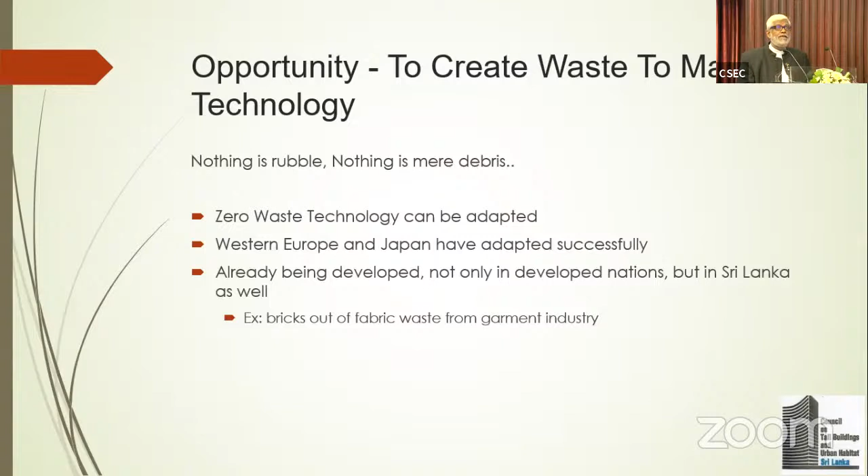Then, the opportunity to use alternate local material for construction. I know there was a time, I think during Dr. Kulasinghe's time, when we were developing certain types of laterite block, using clay with a percentage of cement, which gave fairly high strength. I don't know whether that laterite block is still functioning. These are things we developed but forgot to continue, for easiness, and that's another area we should look at and go back to.

I know of a project done many years ago by one of the leading architects at that time, Mr. Valentine Gunasekara. He built a hotel down south, and some of the slabs, not high long-span slabs, were reinforced with bamboo. I don't know if that technology was developed further; it was just dead. If it had been developed today, we would be scoring very high given the steel prices. Bamboo is a material you grow, cut, and grow again, a sustainable material. We have to look at that type of thing.

Then, the opportunity to create a sustainable construction industry. That is where we are looking, as there is so much high-technology development happening in the world on how the industry can be more sustainable in the coming years.

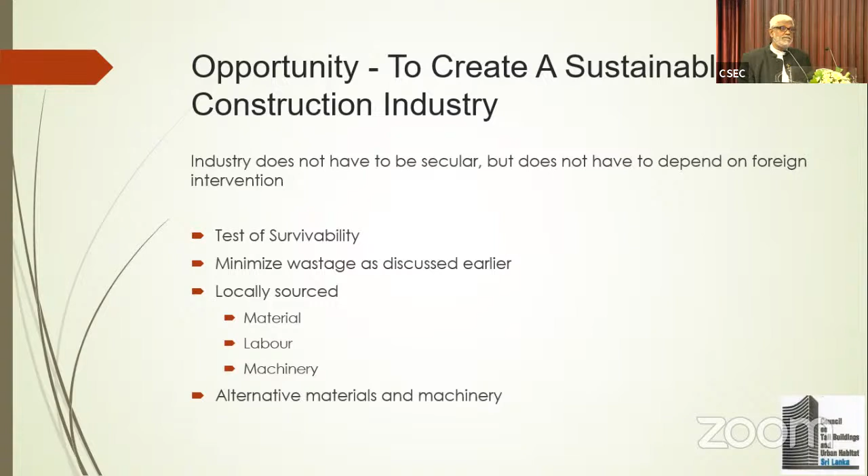Opportunities for young professionals. Yes, young professionals must take this as an opportunity to grasp new technology and work in the global market. When I was president of the SLIA, one of my missions was a statement: we should not be training local architects, we should be training global architects. Unfortunately, that was not carried forward sufficiently. If we had those global architects today, none of these architects would have had problems here, because they would have been global and could travel and work anywhere.

There are certain ingredients, five ingredients I mentioned, for how we make global architects. These are opportunities that we should take forward and navigate this crisis to the best of our ability, because all of us are experienced professionals in the industry and know how to handle things, how to get out of a crisis. So let's all work together on this.

And now, further to the above, recently, CCI made a presentation to the government by submitting a detailed report of the status of the construction industry in Sri Lanka.

I'm glad to announce that after continuous lobbying by the CCI, this week we received a letter addressed by the Department of Fiscal Policy of the Ministry of Finance to the following: Secretary, Ministry of Urban Development Housing, Secretary, Ministry of Industries, Director General Department of National Budget, Director General Department of Public Enterprise, and Director General Department of Public Finance, asking them

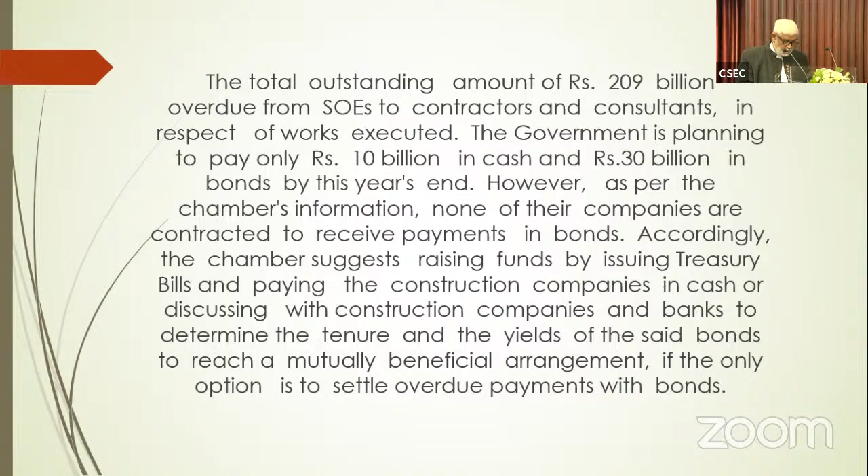So at least we are told to pay one-third of the total overdue amount by end of the year, another one-third by March 2023, and the balance before end of 2023, which is not going to come. So the settlement of construction companies should include interest on delayed payments calculated at the prevailing bank overdraft rate and things like that.

So these are some issues that we have now addressed, and the Ministry of Finance have now put all the ministries that I told you to give their observations and what they think they can do. So at least we have got one step forward. To get this letter out from the ministry took us more than 3 months. So anyway, those are the issues.

Because of the crisis, I was supposed to talk about the crisis, so I'm talking about don't get depressed, we need to come out of this. So ladies and gentlemen, we sincerely hope that there will be a positive response from the said ministries so that we as the construction industry can formulate a long-term policy for the sustenance of our industry. Thank you very much.

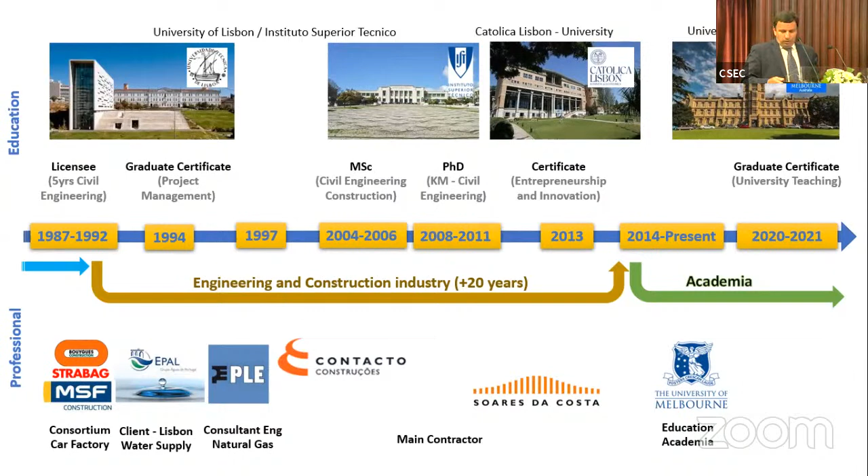Relative to the Council of Tall Buildings, just two publications after I moved to academia. We're trying to share knowledge on how construction management practice can help companies be more profitable, help sustainability, and help reduce net carbon emissions.

Those two cases: one clearly shows our construction management sequence can really improve productivity in tall buildings, that was a case in Melbourne. The other is how plumbing services can really make a contribution to reducing waste.

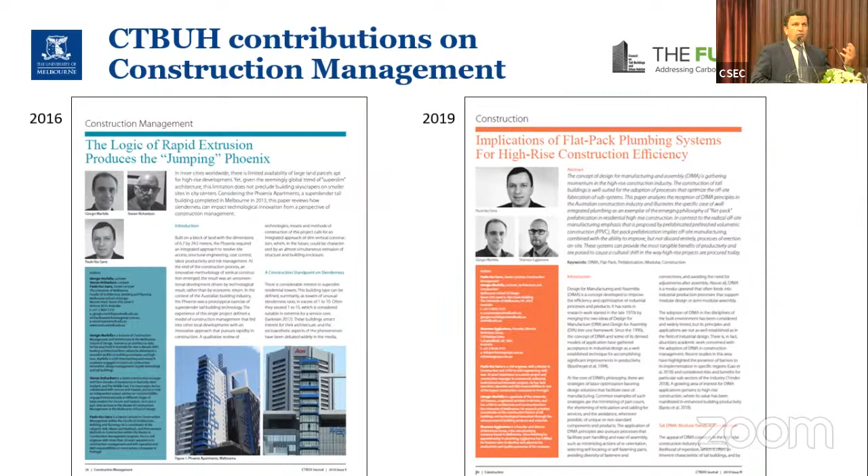On the topic of today, I just read the book we recently published on managing project risks. I think the idea of publishing this book was mainly to give a good tool for everyone, mainly professionals in the construction industry, but projects in general and students, to give them the best approach if they want to develop a risk management system.

It's our passion, it's what we really want. We focus on construction risks, on managing risks mainly. If you address that problem properly, you really feel more prepared and can help your clients, your stakeholders, and be more effective.

I ask you, if you want to have a look at the book, start on chapter 18, which is strategic risk management. That chapter will help you understand what is the best system for you. The dimension of the company is essential—if you are a small company, don't try to invest in a big system that is too expensive, too complicated. If you are a small company, you need a system that is suited for you.

Sometimes Excel is enough. Obviously, if you have a $2, $3, $4 billion dollar project, you need something more sophisticated, but also you have more resources to apply.

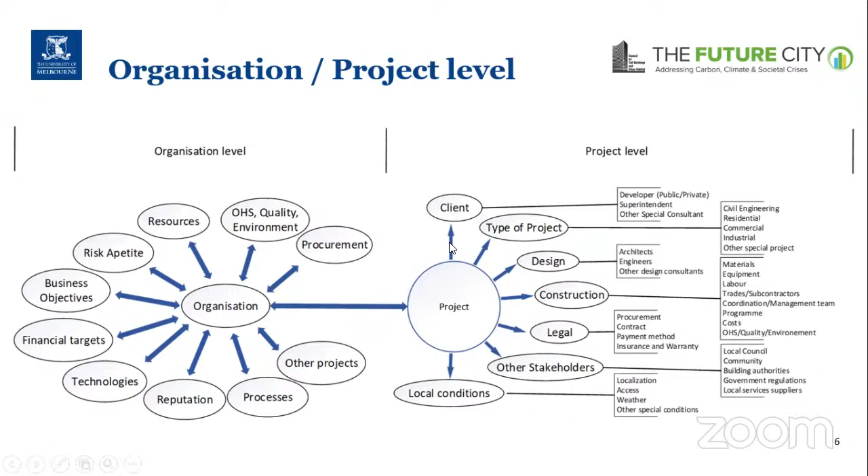Try to see—usually things don't happen immediately in the way you expect. Some have more consequences than you think, but having this is one of the best ways. All directors of companies need that as a base for their knowledge—having someone collect all the information related to the business and put it in front of the table, helping their coordination.

We don't know exactly how politics can react, and some reactions really confuse everyone—we don't know what the reasons are behind some decisions. We believe they want to do the best. Unfortunately, we live with the consequences of good decisions and bad decisions, but we can always try to manage that.

Anyway, we can't talk without the slides.

You can have the most sophisticated system, but if you put rubbish in, you receive rubbish out. Having an understanding of exactly what the context is of your company, of the project you're involved in, is essential for starting to understand the problem.

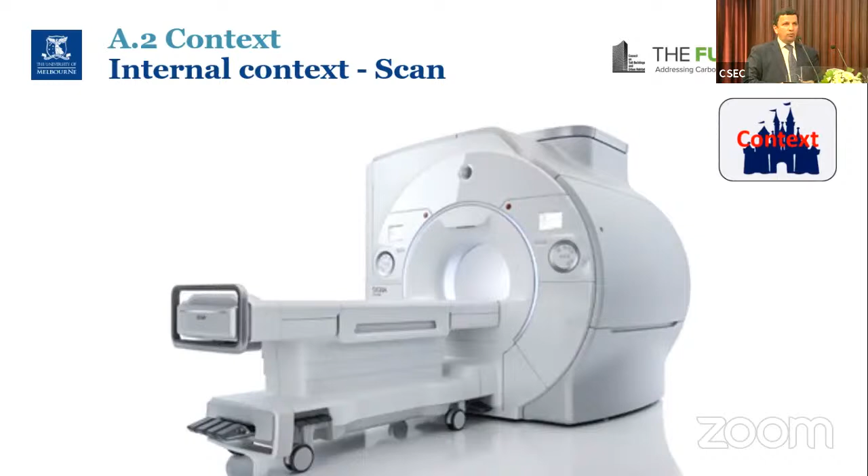Objectives - is labor the problem? Do we need to make profit? Is it time, quality, relations with your clients, health and safety? We need to be the winners, the best. We need to innovate. We need to be environment friendly. We need to be international. Some of those things that we are discussing today cover those perspectives.

Internationally can be an option now in crisis. Diversify - it's another option. Remember, each stakeholder has their own risk profile. If we meet three or four of us, each of us has a different risk profile. When we are thinking on risks, you need to look at your own risks, but each of the stakeholders involved in the project has their own risks. Sometimes they are conflicting - the risk of making money for the contractor can be probably something negative for the client because he wants to keep the money.

Causes, events that have an impact on your risk. You have different tools, I made that available for you. Think about different tools and techniques to identify risks. We just put that together, have a look at the book in that chapter for you to know there are lots of different techniques to identify risks.

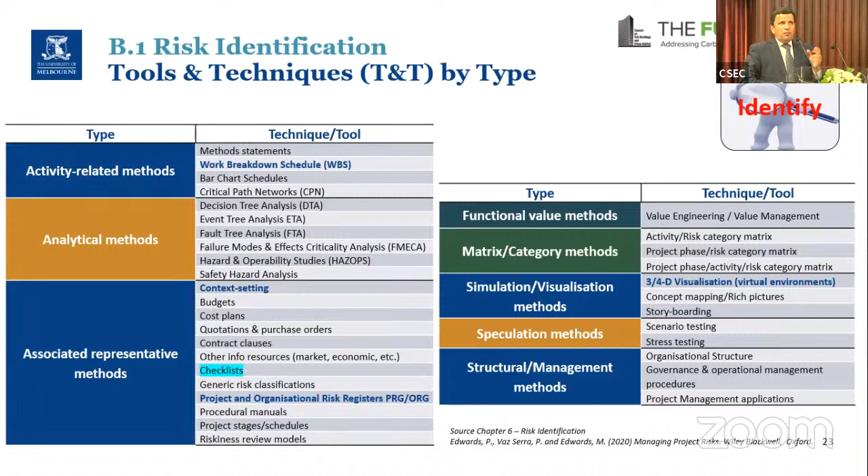You can use some that are specific for safety, others for chemical areas, just for you to have an understanding of what can be available. But the main thing is all of them have brainstorming workshops. It's the best way to identify risks - put people together and try to understand, for each of those involved in each part, what are really the risks.

In big projects you can have hundreds of hours of these workshops, but it's essential that you sit with the team. Sometimes you go to the quality team, or the procurement or commercial team, or finance team, and bring as many people as you want to try to clearly identify the risk. This is essential for the success of your project. Remember, each team has different risks, even for similar projects.

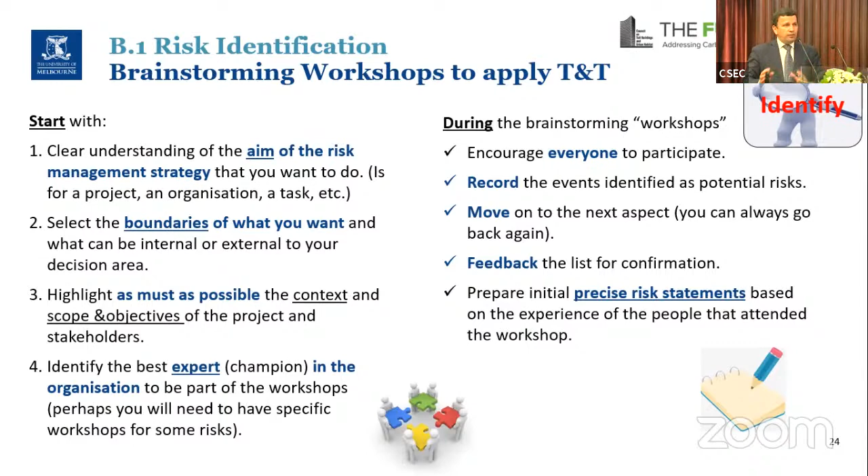As soon as you have that identified, first identify the risk, then you rank it and make an evaluation.

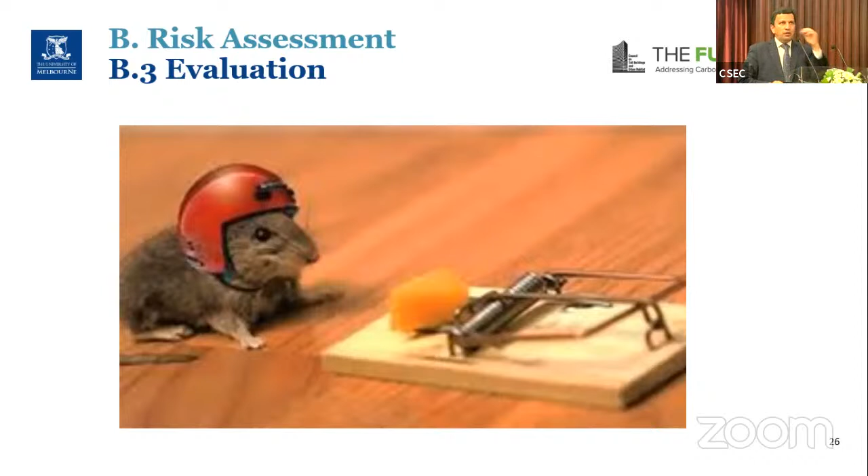Then how that works in the evaluation phase is essential. Insolvency, an unfinished project, we have now covered this. Was the procurement process correct? Did I take too many risks in the procurement phase? I thought at the beginning I was enthusiastic with my client and could include everything. Do I have to make an assessment properly?

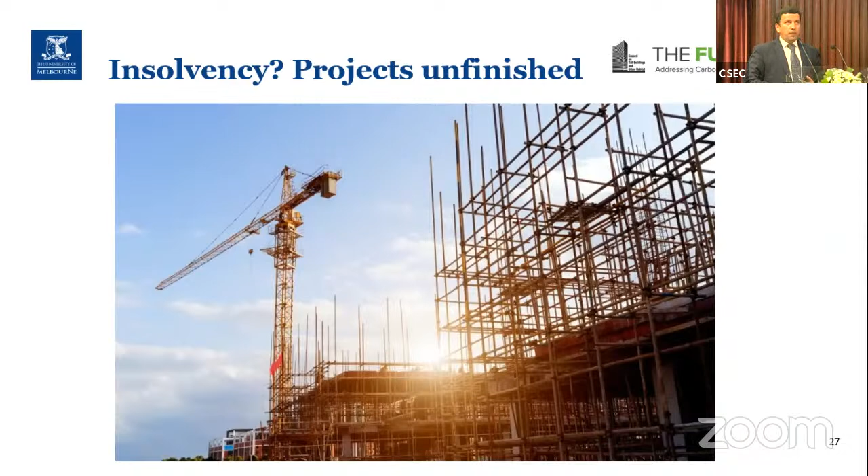It's quite an interesting conversation that happens. What's happening is the client is happy at the beginning, he opens a bottle of champagne, he transfers all the risks to the contractor, and at the end he has an unfinished project. I don't know if you did well opening that bottle of champagne at the beginning, because this model probably costs us later.

Cash flow, how is your cash flow management? I'll just take two minutes, sorry, it's already timing and I want to keep time as promised.

But cash flow, do I have enough contingency? I don't know if you're clear about contingency - it's the amount of money that I need to have in reserve if something goes wrong.

I have a commitment with my client since the beginning about the payment date, this is essential. How is the payment going to be? How am I going to commit with my subcontractor on the payment date? Do I have these dates clearly set? Do I have money in the bank to pay? It's not like before, we don't have that anymore.

When I started, my company had a 20% profit margin. It was fantastic. Now, after we had just 4 or 5 percent, this suddenly became a big problem. We don't have any more cash. So how we manage cash flow is essential - we can have profitable projects.

ProBuild is a big company in Australia that just went bankrupt. They had profitable projects, but because they hadn't managed cash flow properly, on top of COVID and increased times, they went bankrupt. So having a contingency plan is essential.

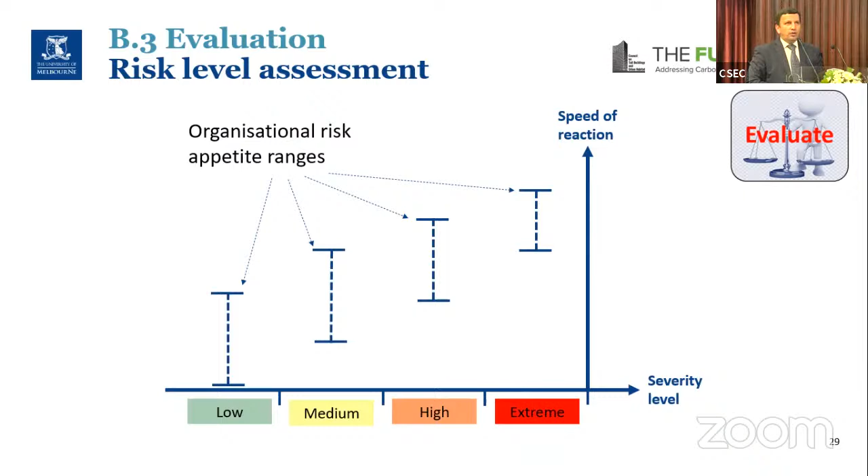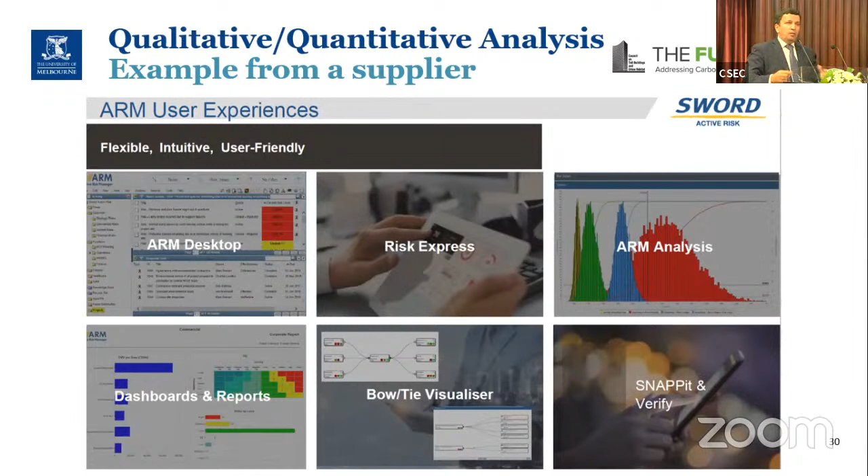How is your strategy on speed of reaction? You put your risks there to visualize. This is a commercial tool with lots of different options to support you. It's expensive, so it's only for big projects, but you now have available the tools to help you manage risks properly. But before using this, use the system properly first.

Then you go to the treatment: what you are going to do. You're going to avoid, share, or reduce. When you link those with your risks, you have your actions. Everyone knows if a risk is to avoid, you need to take immediate action when it happens. If the risk is to reduce, you have other activities to do. Having these visuals and dashboards helps the management take decisions.

This took a little more than 2 minutes, but this is a real example, and managing a risk register like this one can be very simple. If your organization is small, don't make that a problem for doing risk management properly. You can do it in a simple way.

And probably it's a new business for some of the companies here, helping the client de-risk. This is with the client—you really help the client to understand the risks, the main parts of risk of their project, and how you can really de-risk those projects and make something really beneficial for all.

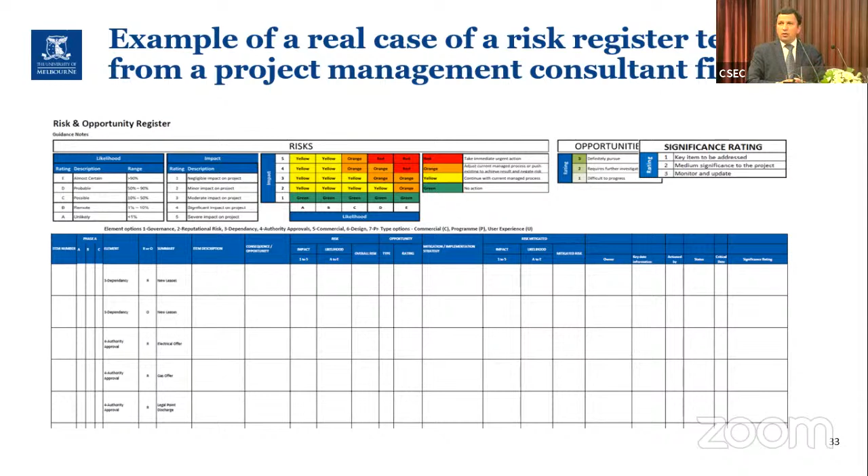I just give you some more data for you to see. Thank you very much. I think we keep more or less on time.

Sorry for some issues at the beginning and during the IT, but my message, I think, was this: trying to understand that risk management exists. Risk management is essential for you to understand that. If you have a strong risk management system, new waves can come—don't be afraid, you already have preparation, and take this big crisis as an opportunity. Always transform difficulties in your life, in your company, in your country as an opportunity. What can we learn from what happened to make us stronger for the future?

Thank you very much. If you have some questions, thank you.

Have some questions? After? Okay, then we have the Q&A after. Okay, thank you.

Thank you, Dr. Paulo, for that timely discussion on managing projects during economical crisis and for carrying on despite the technical errors. The second session on the agenda is the Global Trends Towards Net Zero Tall Buildings, conducted by Professor Priyan Mendis. Priyan Mendis is a professor of civil engineering at the University of Melbourne and a structural engineering consultant. He worked as a structural engineer at Connell Wagner in Melbourne before joining the University of Melbourne in the 1990s. He has been an expert consultant for the design of tall buildings in Australia and overseas, including some of the tallest buildings in the world, and an active participant in CTBUH since the early 1990s. He is also an expert on fire design and protection and a key member of the CTBUH Fire and Facade Committee, presently leading many projects in that area. Professor Mendis has written more than 400 papers with close to 12,500 citations. In 2020 and 2021, he was included in the database of the top 2% of researchers worldwide, prepared by authors from Stanford University. I now invite Professor Priyan to conduct the session.

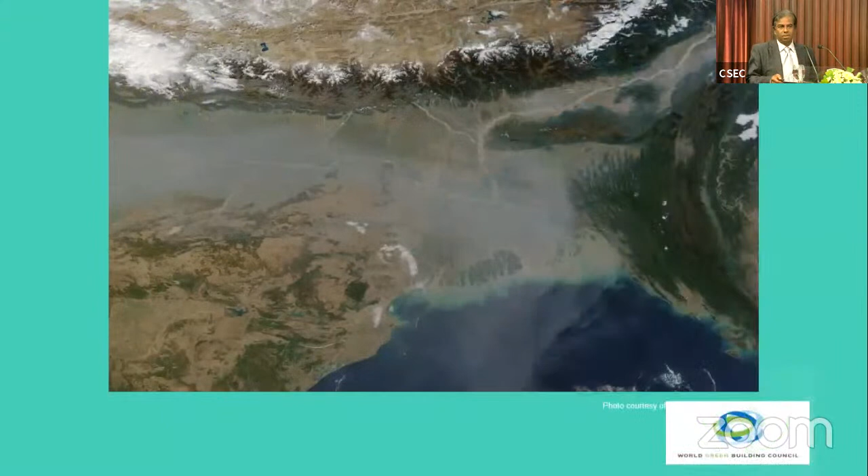So these photos we have seen, I like the same photos I used right now 15-20 years back. I can still say the climate change is real, and the ice is melting. You can go and visit Europe now. These are all happening, we don't need to go and show.

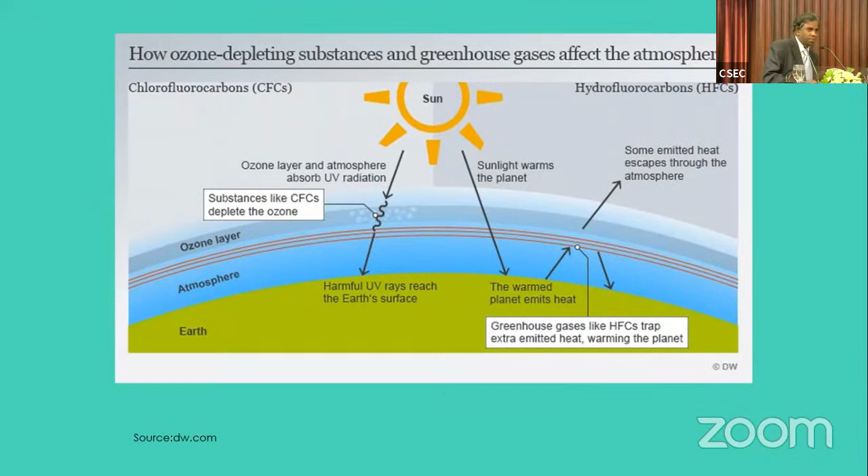Those days when we talked about green buildings and climate change, 50% didn't accept it. US itself 50%, other places as well. But now everyone believes, close to 100% believes. It's unusual to have someone say there's no climate change. And it is happening, this is totally happening now.

Carbon dioxide levels have been measured. It's been proven scientifically, it's not really assumed values. When you measure, you can see the temperature rise.

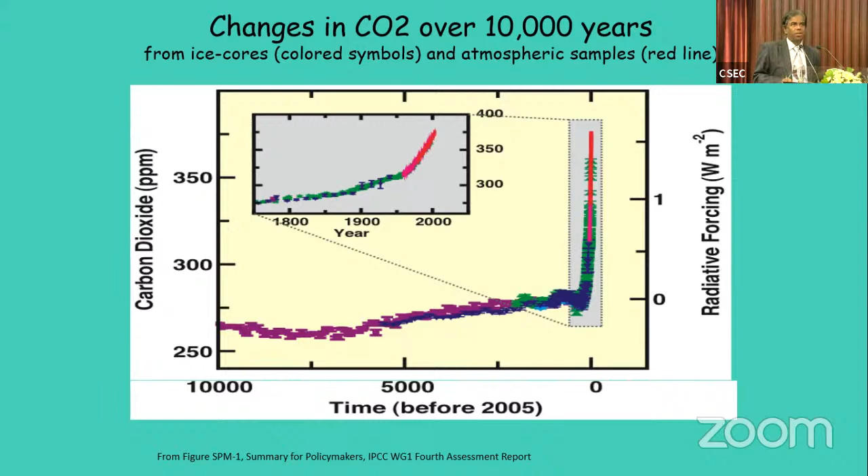When this book was written by Mark Lynas, saying 6 degrees, everyone was saying something's wrong with this guy, how come 6 degrees? He was saying 6 degrees means humans won't exist. Now we are saying, finally by 2050, we are trying to restrict the temperature rise to 1.5 degrees. So 6 degrees would have happened if we didn't do anything, if we didn't get to net zero carbon to really restrict to 1.5 degrees. So now Mark Lynas was very happy about what he said so many years back.

It's happening in Sri Lanka - droughts, climate change, and extreme events. We can see that just because of climate change, it's happening - the droughts and the floods in some parts of the world, landslips, very common now even in Sri Lanka.

This map, which I again showed in another CTBUH forum last year online, in one of the forums - but the carbon, even when I showed this again probably 1.5 years back, it's even hotter now. Carbon is becoming really a business now - carbon accounting, carbon management - people have started businesses just on carbon.

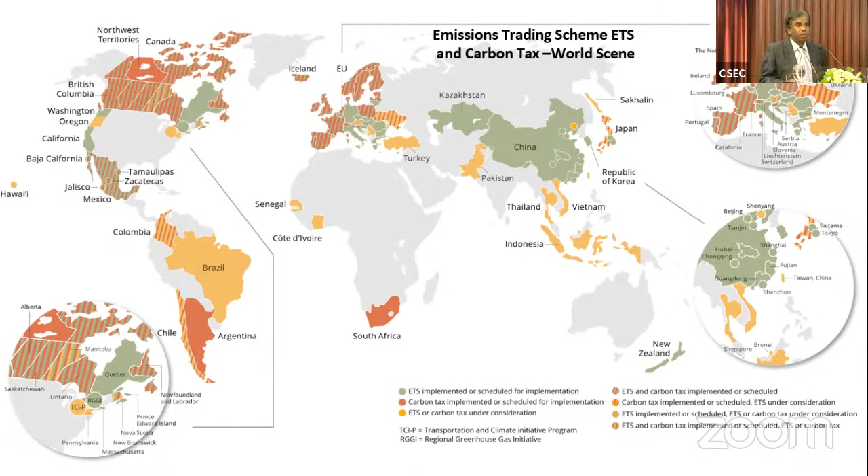I can talk for hours and hours about that, but I'm conscious about the time, I'll limit this talk to a certain level. But it's happening everywhere - emissions trading schemes, the carbon prices are going up. Europe always led the world in this area.

Dr. Paulo, some of your companies have experience and were well ahead of the game. But now we are all catching up. At the same time, I think the carbon prices are catching up - Australia, I know, going up very quickly. I'll give some reasons for that later on.

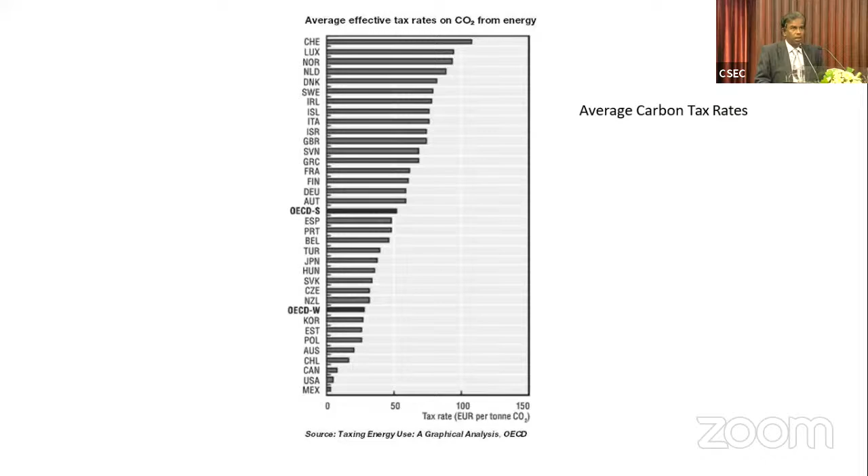We all know what happened really in the Glasgow meeting - we said we didn't have any plan, then we said let's limit to 1.5 degrees, then we said we'll go and by 2050 make it net carbon zero - all that came up, quantified in that particular meeting. That is the turning point.

Before also we had all that, we knew we had to do it, but that's where when we started putting numbers, then only everyone got interested. So there's a target, we had to set a target. Before we were saying let's make it green buildings, all sorts of things.

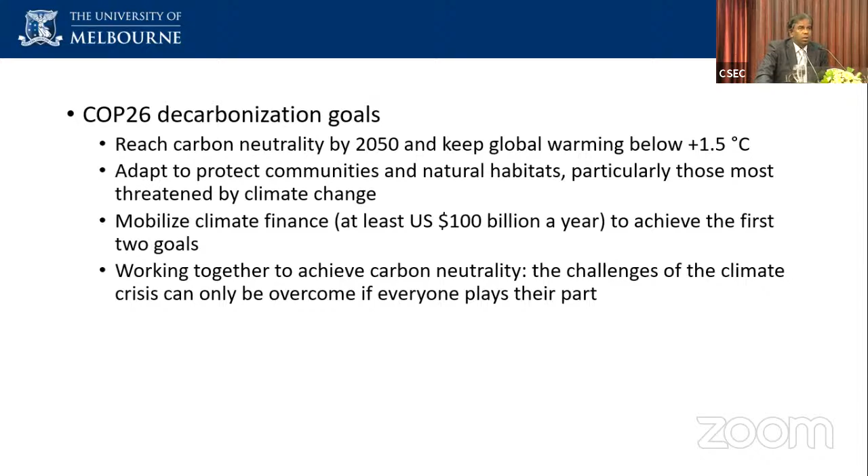But now that there's a target. This really, in the Australian context, is why we are all in the construction industry. The C&D waste - even if you take off some numbers - we have a big problem in Australia. Not to worry too much about the exact numbers, it is extremely important to address C&D waste.

We had a climate change bill which changed everything with the new government coming into power. Even though Australia was against some of these targets before, the new government put forward a target of 43% emissions reduction by 2030. We are still only at about 18%, and we've seen how quickly this year has gone. These are impossible targets as far as I'm concerned.

At the same time, we also set a target of net zero by 2050 - another impossible target. That's why everyone gathering here, the AEC industry - architects, engineering and construction - we will have the opportunity. We are the worst, really, and at the same time we are the ones who, I don't want to use the word polluters, but we are also the solution. We provide the solution that will create opportunities and new innovations for our industry, so the value of everyone here will go up because of this.

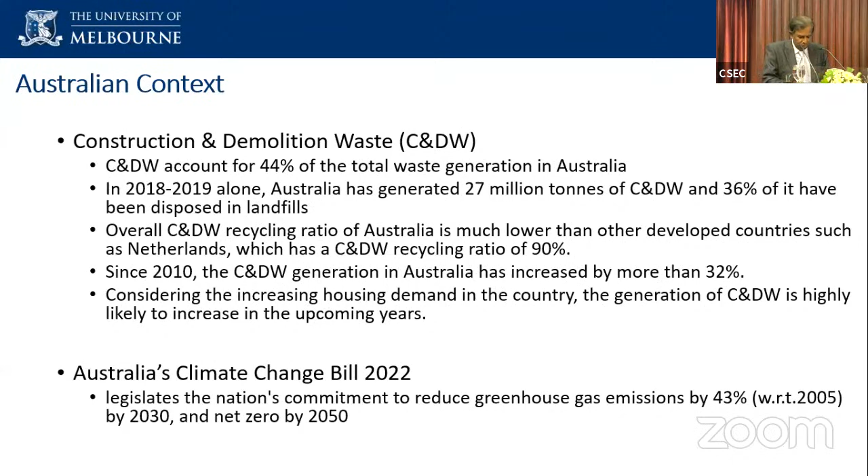These are just casual numbers - I put them together a while back, and WGBC came up with similar numbers, but I'm sure they'll get modified. Don't worry whether it's 32 or 33 percent - the point is the world uses a huge amount of resources and energy, with waste materials going to landfill. Australia has completely stopped creating new landfills, which has opened up so many opportunities for us to work on recovered resources.

We don't even use the word waste anymore - now we use the term recovered resources. Waste is becoming gold. One day it will be worth a lot, because the people who are really working on waste feedstock now will become very rich. It's going to happen.

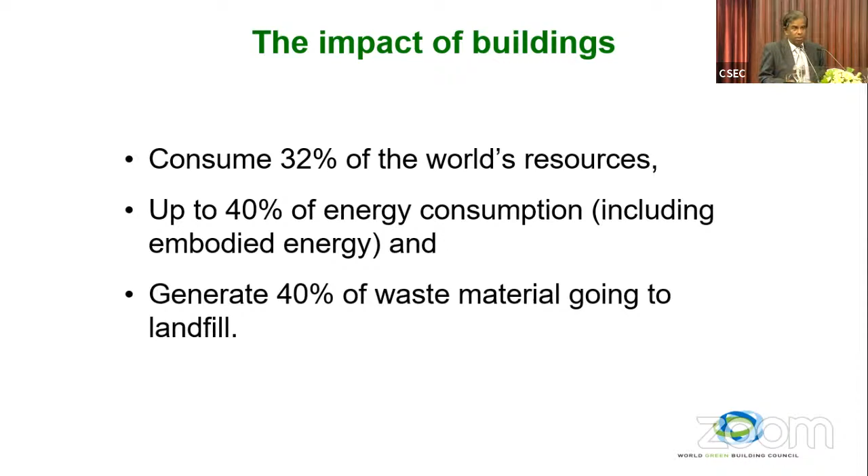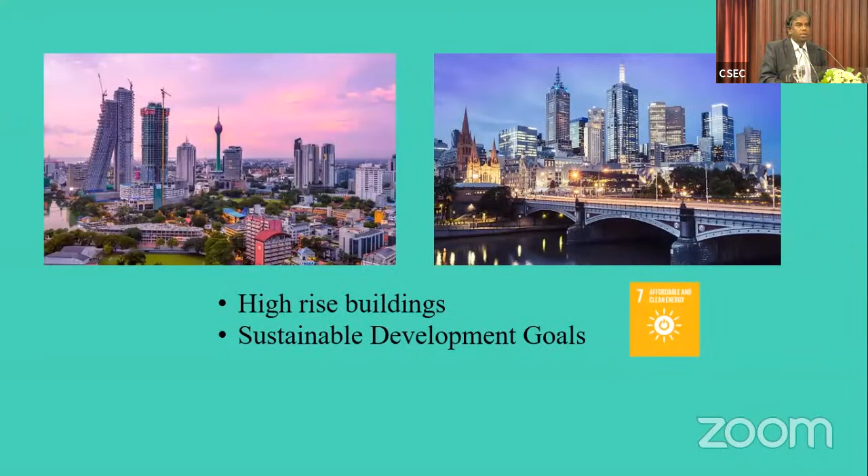We have the UN SDG goals around energy, but there are other goals too, and high-rise buildings are key here. If you think of buildings, we are the giants working on tall buildings, and we can make a real difference to the world.

I don't want to spend a lot of time on linear versus circular economy - we've heard these general statements before, that we are linear, just working one way. When I gave this talk as an after-dinner speaker at a circular economy conference in Australia a few months back, I thought no one would laugh, but everyone did.

I defined the circular economy for a layman in the easiest way, rather than talking about circles abstractly. I said we are used to going very straight, but now we have to go round and round in circles to get things done. That's how the circular economy can be defined - though actually, it's not quite that. It's really the total opposite.

It's really an opportunity to work properly on materials. We didn't used to think about what's going to happen, about the end of life. When we had a project, we didn't think about end of life - we just focused on construction, talked about some materials, and then left it. End of life wasn't considered.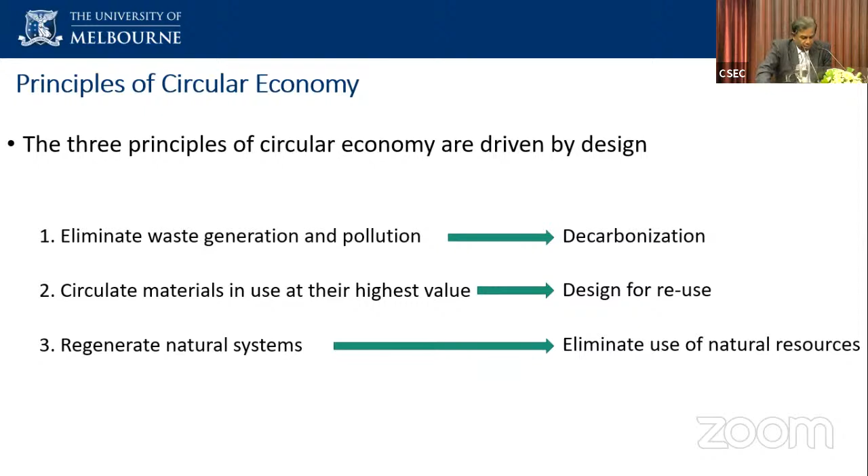The decarbonization keywords now - design for reuse. These are new terms, I don't know whether I introduced that, I just use it, I'm sure I've seen others using it now. Design for reuse, the material side I'm talking about, and the regeneration - thinking of natural systems that eliminate the use of natural resources. This diagram I will not explain.

That's from the World Green Building Council website - they have lots of resources already. As I said, the Sri Lanka Council is one of the most active, following some of those principles, and even going some steps further, which I will mention. But these are all about how to define that - I will not spend time on it, I will just share these slides, because the definitions we have to get right.

What is this net zero carbon in buildings? What do they mean by them? The definitions need to be really understood clearly, because people interchange some of that.

This is from Advancing Net Zero, the program. I think Professor Ranjit, you would have been there. I was also in one of the cities conferences when WGBC launched the Advancing Net Zero concepts - they got a lot of resources and spent a lot of time. So these definitions are quite important.

People still don't understand what net zero means. So what is a net zero energy building? It really means 100% of the energy has to be done using on-site renewable energy. There are building service engineers in this audience, and I know senior people as well, so we know it's impossible to get net zero energy buildings.

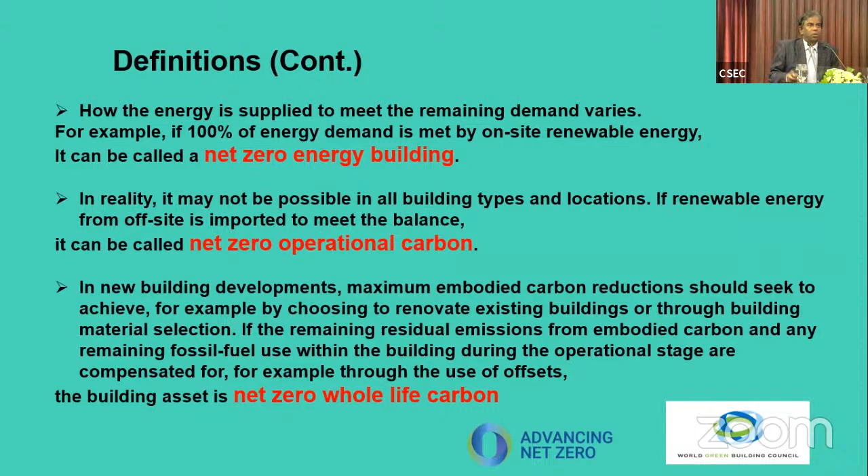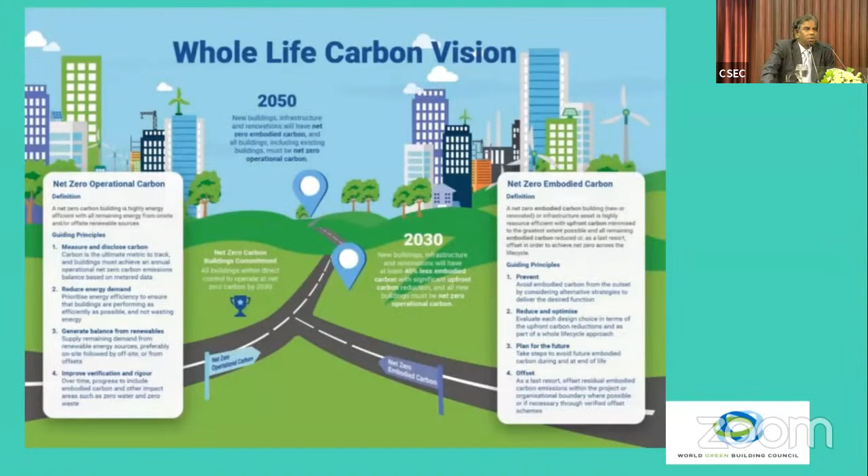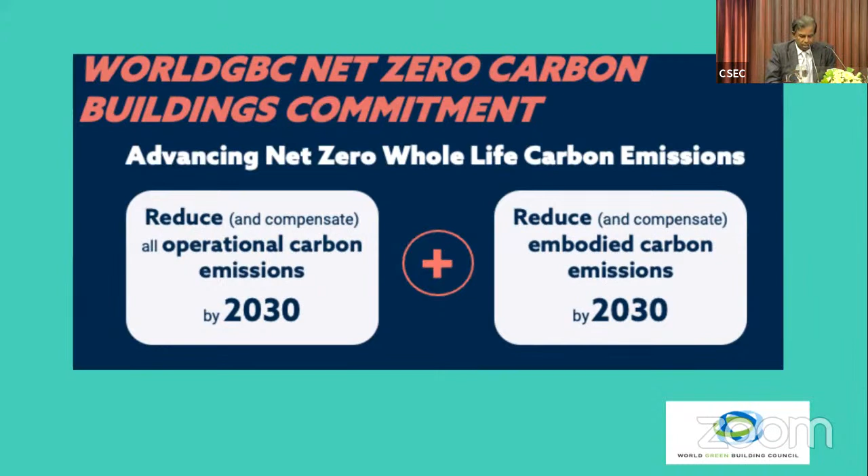This World GBC has a whole life carbon vision, which you can read on their website. It's probably ambitious, but it aims to reduce all operational carbon emissions by 2030 and reduce embodied carbon emissions too. Maybe we worked hard and tried to achieve that, but time is passing. I'm not sure if we'll achieve it, but the positive thing is that we're working towards that goal. I showed this many years back.

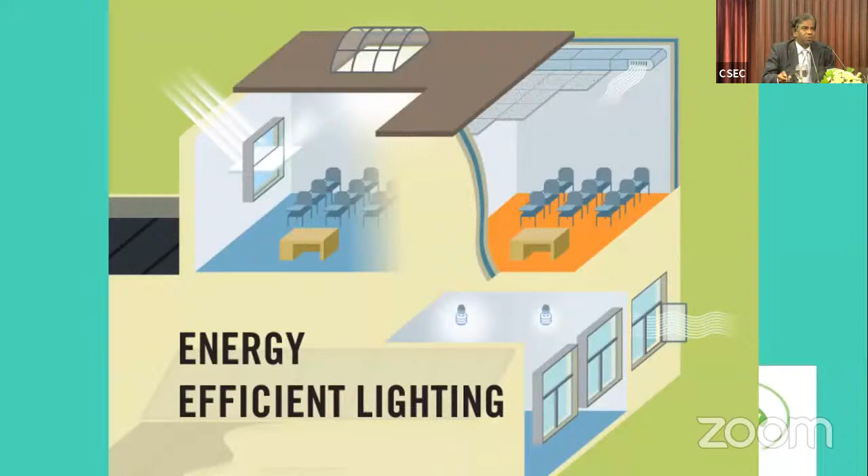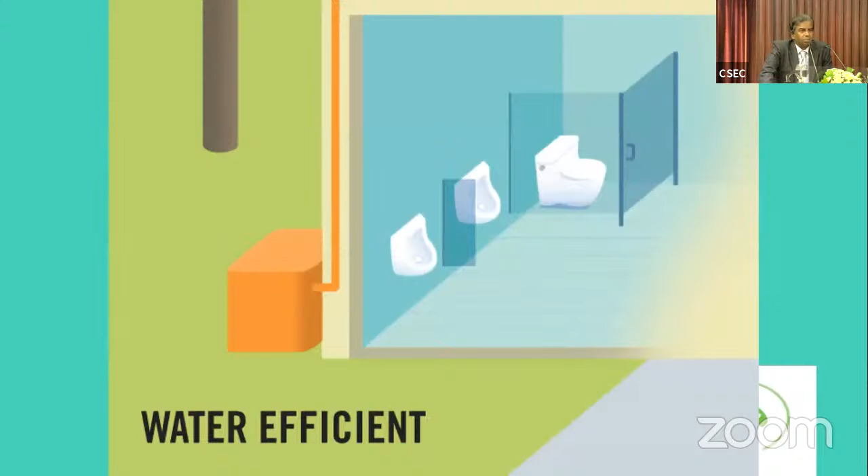So what can you do? We can have energy efficient lighting - we know all that now, nothing new. Solar panels, we know. Green roofs, we know. Water efficient systems were new at that time, but we know them now. Acoustic and thermal comfort, we know. We know daylighting has to be there. Low emitting materials and alternate transportation methods have to be there.

Just go for electrical vehicles. I saw even in Colombo now they're displaying new types of scooters and cars. Europe has gone all hydrogen for trucks, and cars are mostly electric now - the new models are all electric. Australia has been slow, but Sri Lanka too - though because of the crisis, there are positives. A lot more electric cars have come now, obviously here in Sri Lanka as well.

Recycling - when we talked about that at that time, there wasn't much interest, but we know it's growing.

Anyway, some of the solutions I'll talk about very quickly - we won't take all the time. These are topics I can talk for hours and hours about, but there will be a paper presented at the Kandy Conference in the CTBUH session.

Thanks to Professor Disanayaka, we still run the Kandy Conference. There's a paper in the CTBUH session, I think Saturday morning - Mr. Hardy is the organizer, so there's a paper from there. Some of our friends from Melbourne have done a quick study. They're saying there's no work done in Sri Lanka on quantifying - quantification is key. On net zero energy and solar panels, they've done a crude study on panels themselves, comparing a few buildings in Sri Lanka, and found that in some places only 3% of emissions can be offset this way.

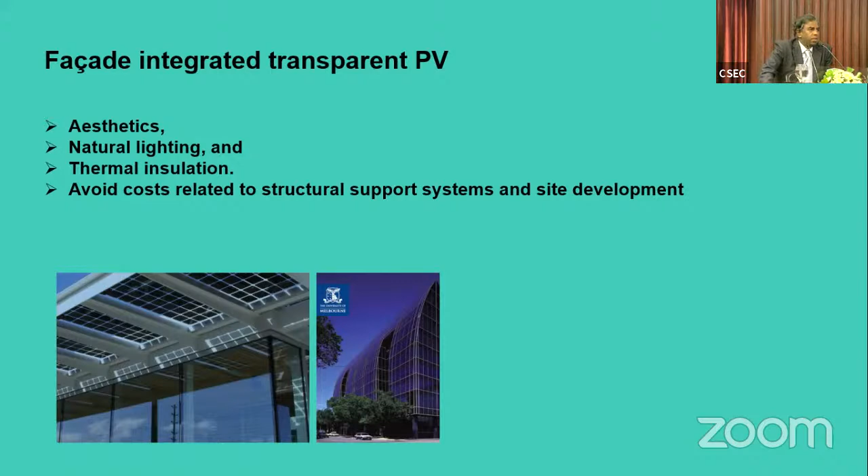So anyway, these are things needed to get to net zero carbon or whatever - operational carbon is not easy to really achieve. Some solutions have been provided, maybe we need to spend money, but it's really worthwhile to get into these high values. So to get to net zero carbon, my message is it's not easy, especially for tall buildings. You need to go above present numbers, and clients will need to approve some extra cost.

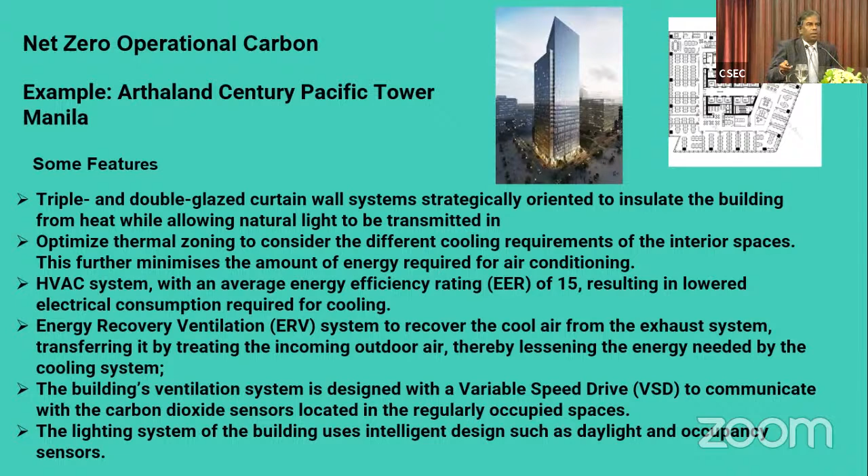So that way, I think we have a certain amount of really support from the clients themselves. It's work done by the BSEC team on energy performance and optimization of one of the buildings.

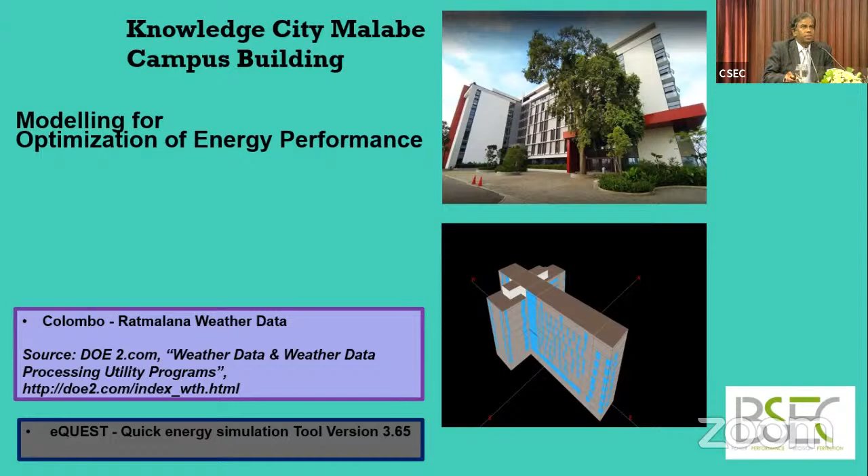I think this quantification from modeling solutions should be based on the modeling, so modeling will become important. I know Green Building Council is also running courses on this now in Sri Lanka. So some of the solutions have to come from the quantification. That's where the solutions are.

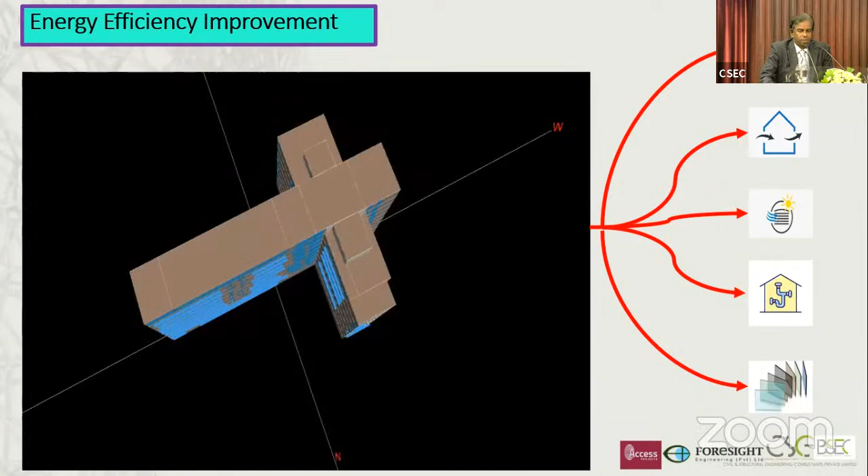Let's go through this very quickly. Carbon sequestration - to get to net zero, you need to really absorb the carbon. I have a student looking at using carbon dioxide for curing concrete.

There's also, I don't think I can share all of it, but what we're looking at is also the cement production. You have the main problem - I don't think I can talk about all that, it will take ages.

The main problem, as I'm sure everyone knows - though when I asked another audience in Australia, they said they thought everyone knew - is why cement is the most polluting material. Maybe I'll give the answer.

That is because of the lime, the calcium carbonates. We take the calcium carbonates and convert them to lime when we manufacture cement. So CO2 is emitted at that time, during the conversion of limestone to lime.

So that CO2 - when cement companies produce CO2, we take the CO2 and try to use it for curing the concrete. Because if you look at the concrete material, converting it into absorbing carbon dioxide, as long as we don't allow it to really react with water and convert it to H2CO3.

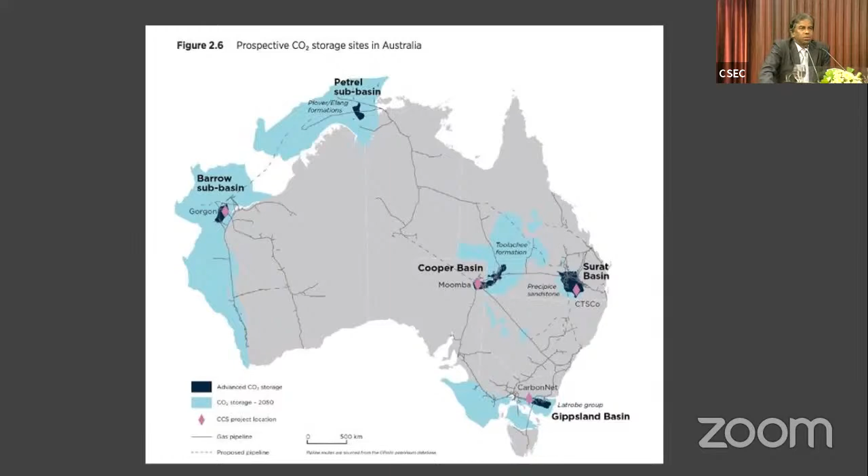See what has happened in 2-3 years - now everyone wants to invest in hydrogen. Again, one of the chemical engineering lecturers from Monash Uni has joined doing hydrogen research. I'm just a co-supervisor, not the principal, but we are doing some work on that.

These are my areas, I don't need to go through this in detail - I've given talks on modular and prefabricated construction. Rapid construction has to be done, because what we've done now is really get the embodied energy of the materials and operational energy. Then we're also talking about the construction side.

We've ignored that side. During construction, we need rapid construction - saving time, whether 6 months or 1 year, will really reduce the carbon footprint of the construction methods.

We got a project manager who completed a very important project. I think I'm allowed to say that because I worked with Shomal to complete the Tyson project - a very important project. Thank you for being here. It's a very nice project which really shows this.

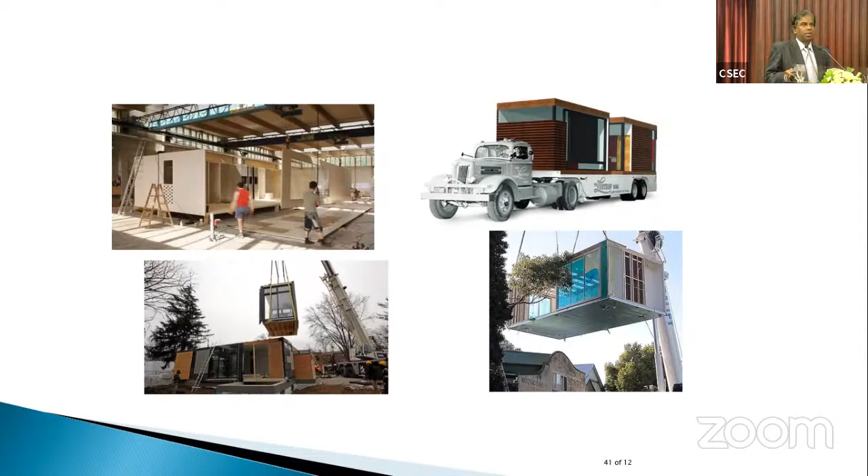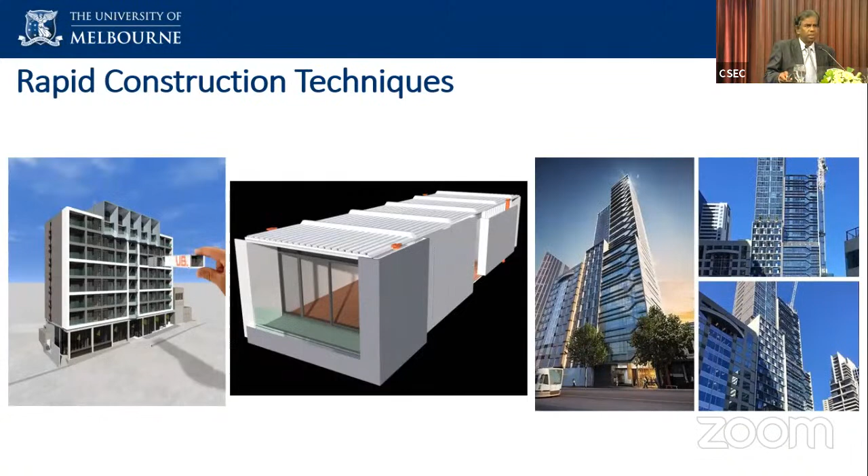So my message is clear to our industry - it is an opportunity in this area. Rapid construction techniques allow you to do high rise. That's one in Melbourne which I had some involvement in - the full modular one, I think that's the real high rise in the world, fully modular.

These buildings can be used as material banks. Once they reach end of life, they can be really converted into real materials, reused again. So the advantage of prefab is it's a full circular economy.

I know I'll be very quick, running out of time. I'm probably not the first person to think about Construction 5.0 — a quicker, cheaper, environmentally friendly, sustainable, high quality construction. I had this slide now for 5 years, but it's very hot now. I see the word Construction 5.0 more and more; I'm sure others use it too.

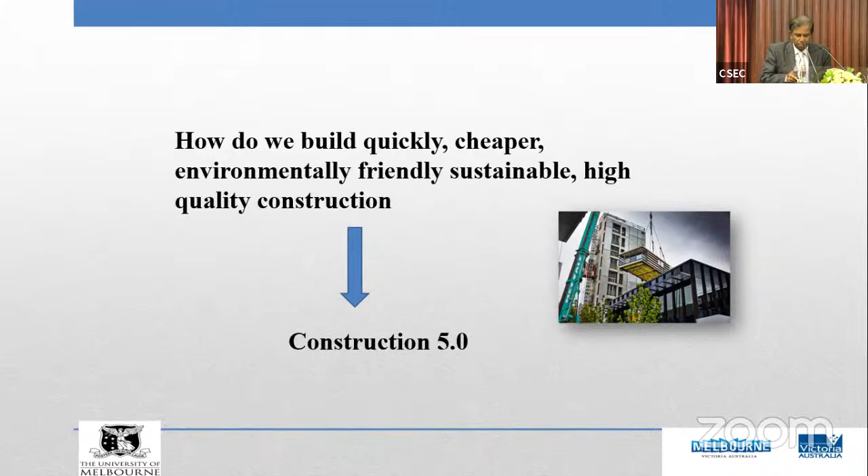You will see more and more the net zero carbon management word. Coming back to my topic, carbon management will become a key driver for construction, whatever the new modern construction is. We can't forget that.

This is something I suggested for a 1 kilometer tower in Dubai, at the concept stage, to have slots in the structure. That didn't get built — the GFC came — but one day hopefully. Those slots we calculated to reduce the wind loads and improve efficiency, so we have to really use the design side as well.

It's a total game now with this carbon management. By doing that, you reduce the materials, reduce construction times, make it efficient, reduce the foundation materials. That all can be quantified back to the carbon number. That will be the key in the future.

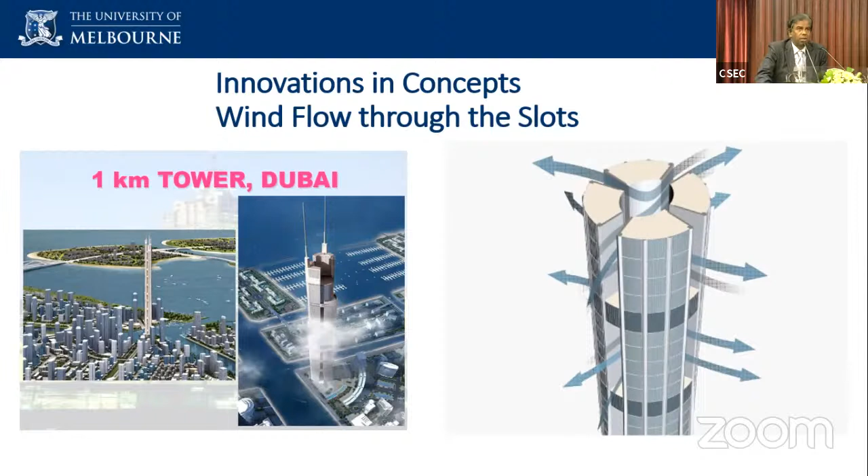I hope this one gets built one day. My team, including one of my PhD students at the time, did a lot of CFD to come up with this, working with WSP at that time, and with Mr. Anil Hira, who was here — he's the one who brought me to this project.

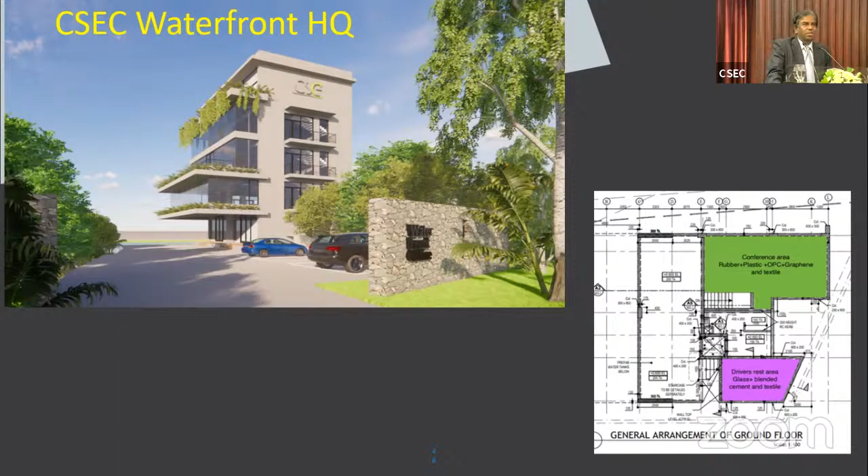Very quickly, recycled materials — you've heard me talk about this, so I'll skip ahead. This is a unique one we did, which Mr. Shomar gave me permission to use — I call it a fruit salad. I think it's probably one of the first in the world to use in a slab all sorts of materials, including — I'm sure no one will get offended — even hair as a waste material. I haven't seen others using that. It's an opportunity I don't get in other parts of the world, to try these things out.

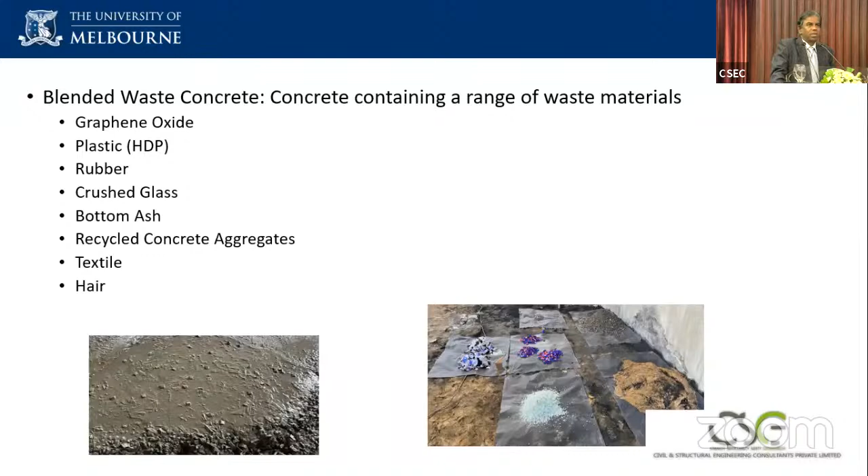Here we could try out all sorts of materials. Bottom ash was used for the whole staircase, to bump up the strength going down. I used some graphene oxide for the column too, working closely with CGT here and Mr. Shara's team with graphene — the GrapheCrete, the name I gave for the graphene concrete. Another day I'll talk more about graphene concrete.

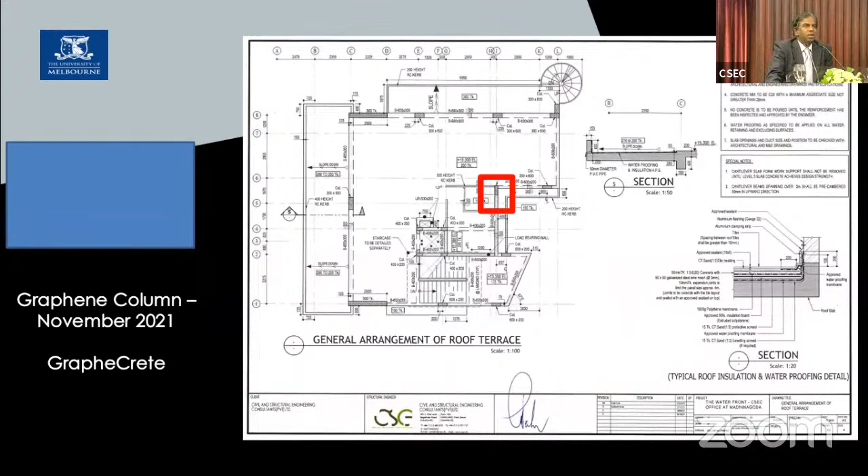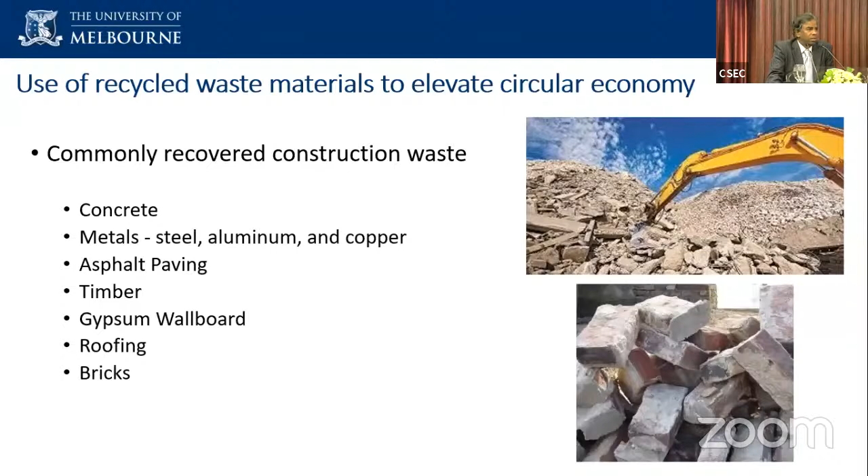With recycled waste materials being key, we're using them in other projects too — all sorts of projects on glass, paper, textiles, tires. Not only us, many are doing it. But the only problem is people are doing research, and it's very hard to get it into practice.

That's one of the first we've done for a big project, the Metro Tunnel project. There my team put glass concrete — only for a temporary slab. We don't yet have the scientific evidence to put that into larger, load-bearing projects. This was only temporary slabs, so we were allowed to do that, and I was doing some work on ASR in glass and other things. I think it had to be done.

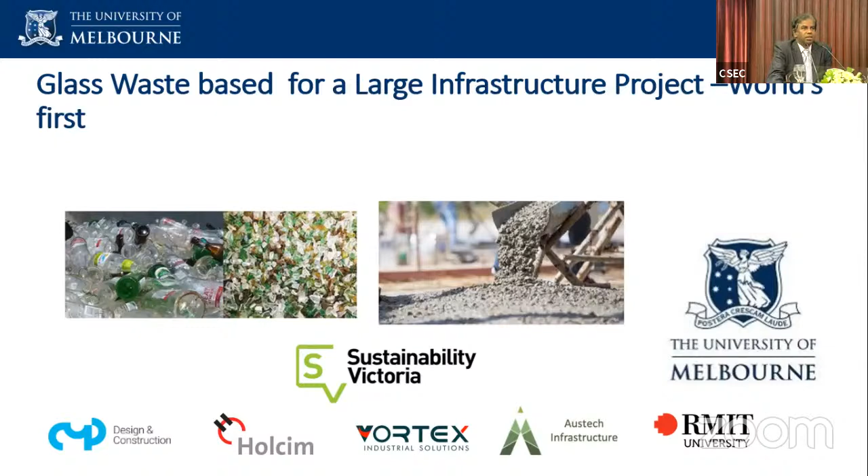I think I'm taking too long — I think I better stop. I can keep talking, maybe 2 more minutes.

The main problem was not knowing how to use glass in concrete, but the pumping — the glass gets stuck in the pumps. These are things we don't understand. In the lab, we can put anything in these days and make it work, but when it comes to practice, these practical problems arise.

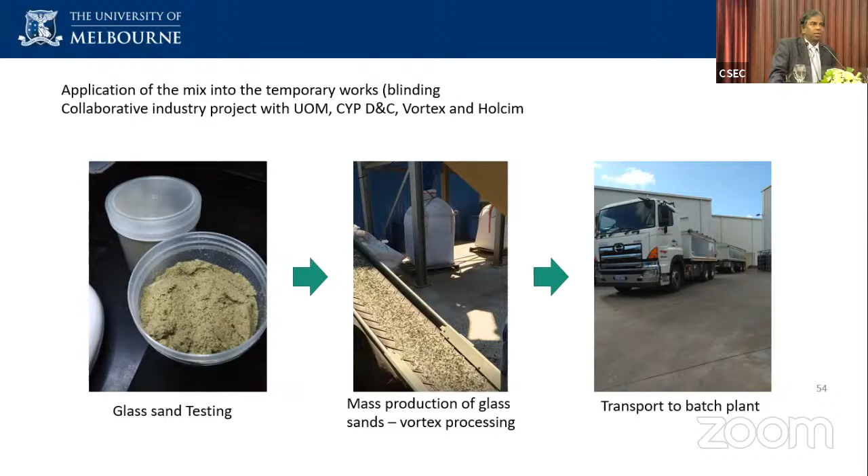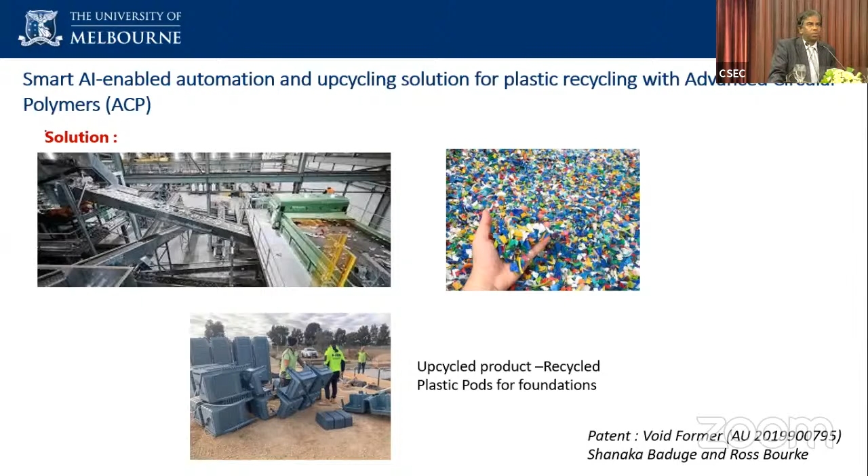In the last 2-3 slides, when you do the analysis, quantification is key. I won't go through this work I presented 10 years back - we took a high-rise building and did a quantification of the carbons at that time. I won't go through it, but it's still relevant now, even more relevant. The same methods haven't changed.

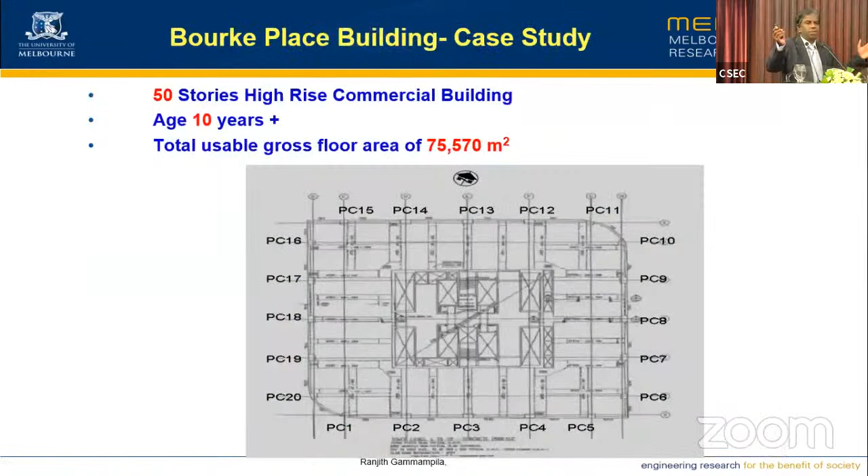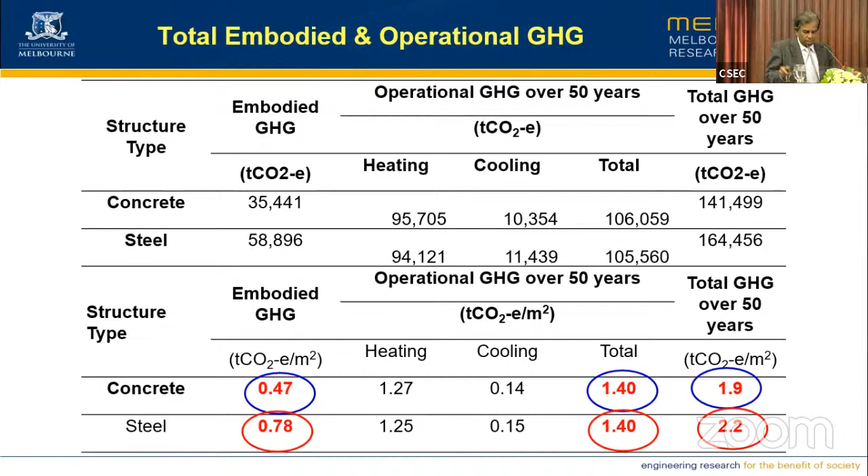This never happened before - in the future, there are 3 or 4 suggested concepts for tall buildings where whoever gets not just the lowest cost, but the lowest carbon number, will get the job. We know it's going to happen. That didn't happen a few years back, but now I can see that happening in new tall buildings. The world has changed so much - those who were environmentally friendly now talk about these things, and now there are many other incentives. So our industry should take this as an opportunity.

I think I'll stop there.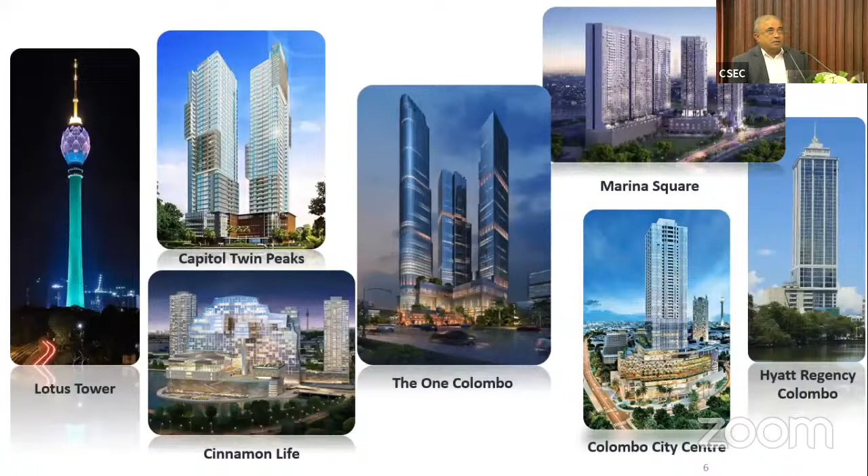We were guided by Professor Mendis to follow the Australian standards, because Australia, with respect to wind and earthquake, are similar in nature. Some of the clients pushed us to follow the Indian standards, some pushed us to follow the Chinese standards, but since we didn't have proper standards of our own...

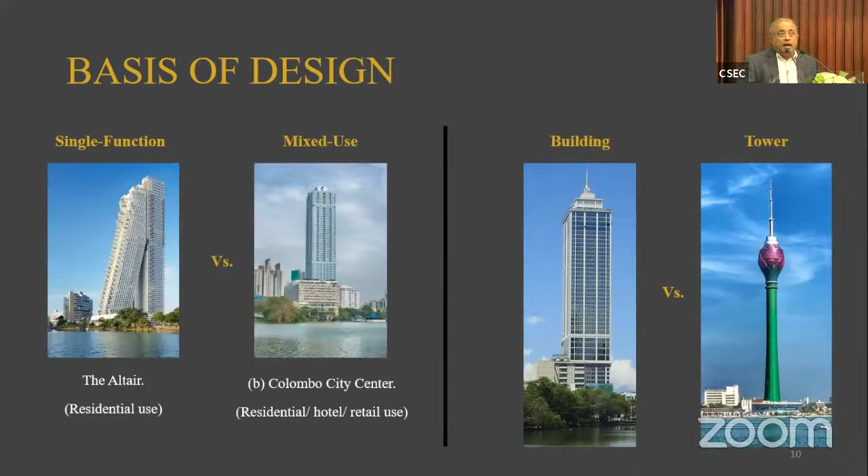Also different structural systems - you can see frame structures, shear wall structures, shear wall and frame systems, and also some of the bundle systems that we have introduced. Outriggers, you can see, in one tower the outriggers that we have used. So all the experience we got during the process, we have put into the document.

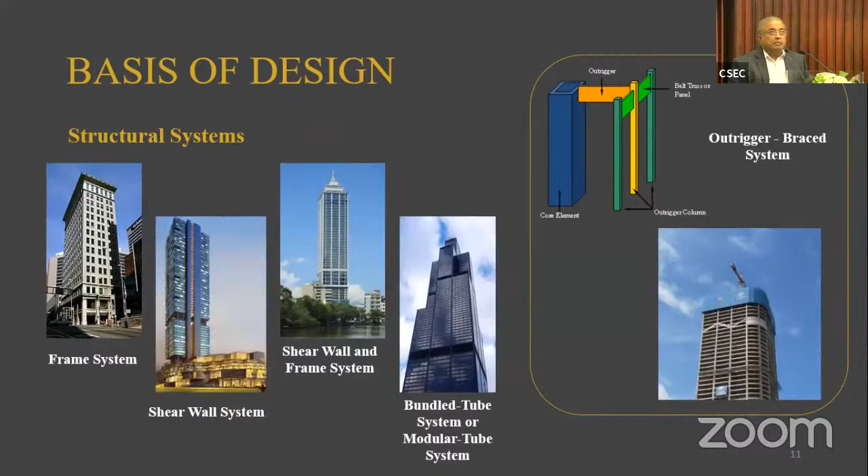So with respect to loading, we have looked at the possible loading scenarios, mainly following the Eurocodes. With respect to wind, we have wind data by doing so many buildings using RWDI, CPP, and many other European wind tunnel agencies. We have developed the wind climate data.

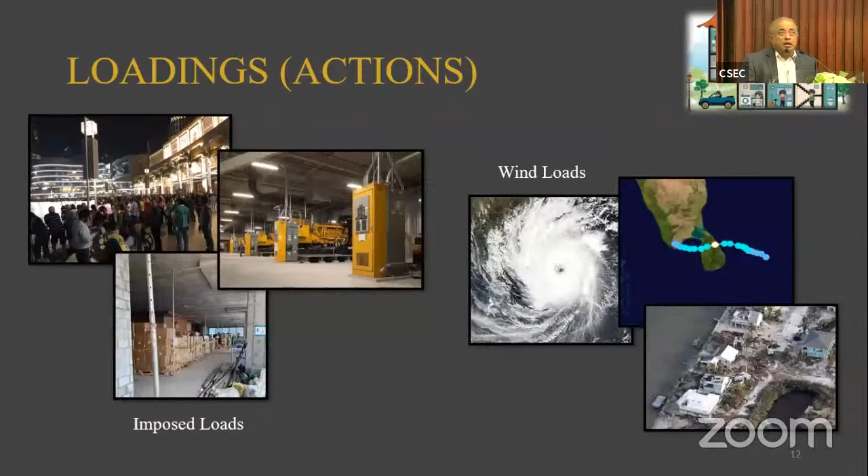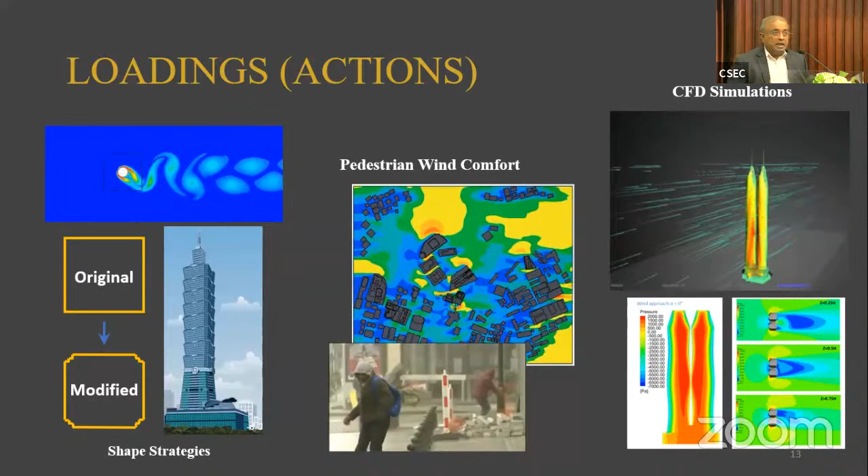So basically, for tall buildings versus short buildings, the difference is wind excitation is very important. The wind may excite the lateral movement. Because of that, you need to do wind tunnel studies, initially maybe CFD studies, where you need to modify the topology, working with the architect to reduce the wind loads on the structure. It governs the major load.

And what we don't understand, and also we don't have laws in Sri Lanka, is that when we build a building, the pedestrian level gets affected because of the wind climate. So we need to do studies using wind tunnel or CFD studies. Also the wind pressures at different levels are different, so you need to study that using CFD or wind tunnel studies.

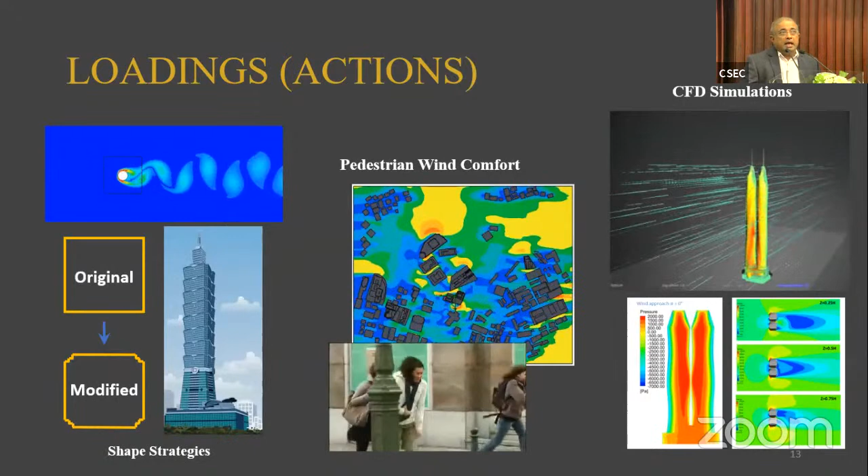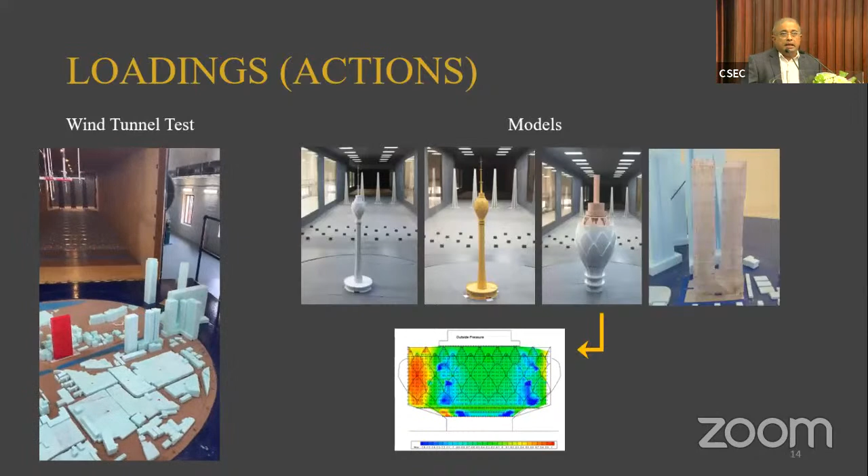So this is a typical wind tunnel that we have used. Most of the designers don't have the opportunity to do that. We have done all types of wind tunnel studies - aeroelastic studies, rigid model studies, and pressure data studies. So all that has been included, and with respect to earthquake, of course, Sri Lanka and Australia are on the same plate.

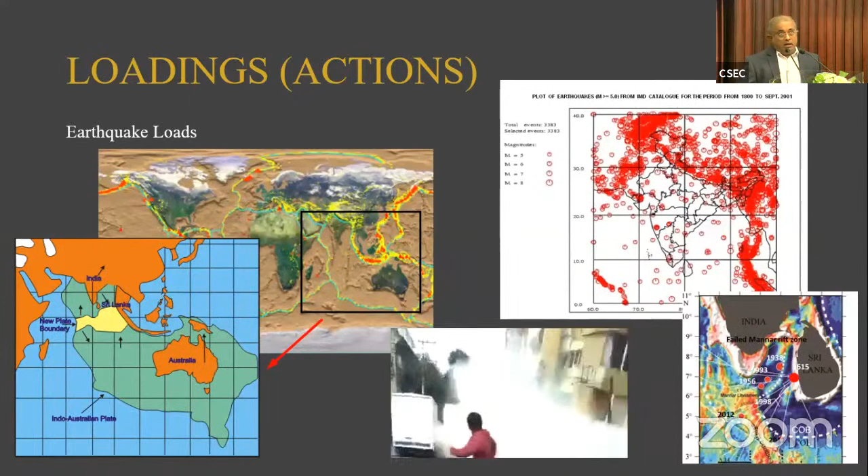Indo-Australian plate, and a lot of studies has been done by Professor Abekon and also Professor Disanayaka's team of University of Peradeniya. Now Dr. Dhananjaya has formulated the earthquake response spectrum. So we have used all that to develop the design criteria for earthquakes in Sri Lanka, especially for Colombo.

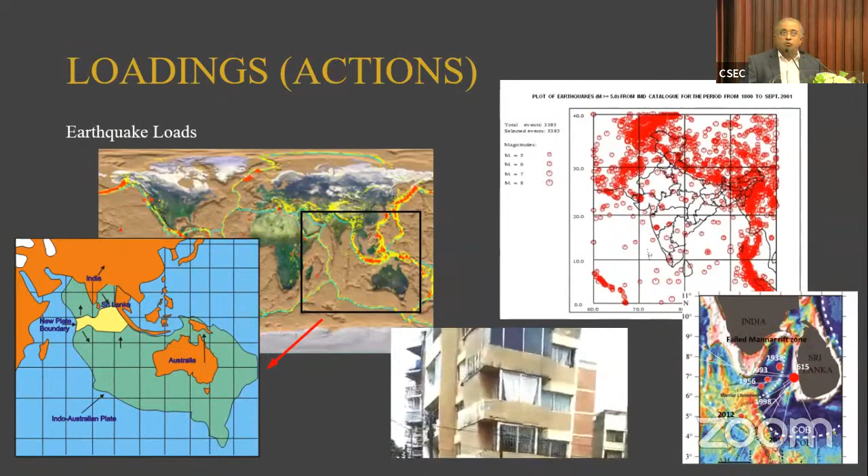Detailing - of course, the Society of Structural Engineers has a guideline. If you do the detailing according to that, there is a possibility of surviving that earthquake. So we're promoting that, but you have to properly calculate and see the risk and design.

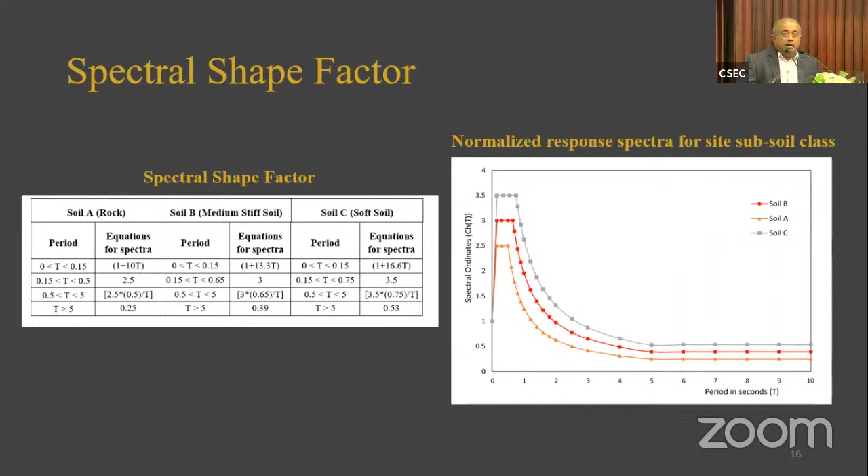These are the response spectrums that we are introducing - new response spectrums with respect to the 50-year return period, 500-year return period, and the 2,500-year return period earthquakes. So here we are trying to give a criteria.

We are in a low seismic region, where therefore in a frequent earthquake - that is the 50-year earthquake - our performance of the building should not get affected; it should be immediate occupancy. With respect to the 500-year return period, should be life safety. And then with respect to the 2,500-year earthquake, the building should not collapse. So those are the criteria that we have targeted with respect to the performance design-based reduction.

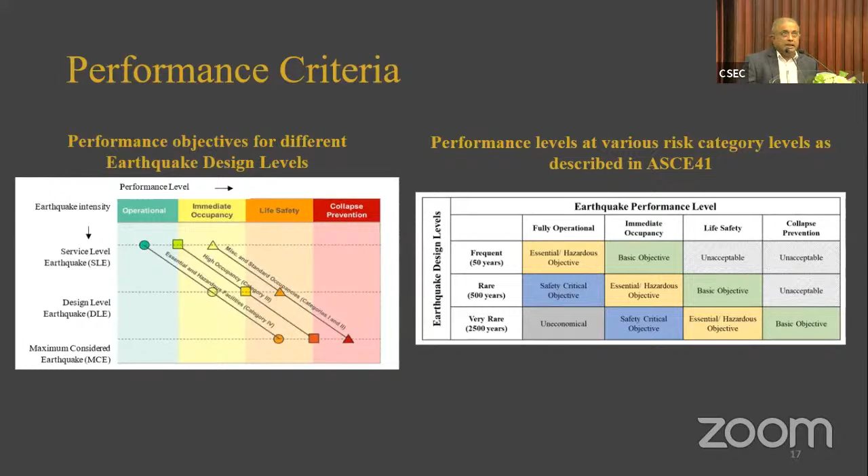With respect to materials, we have introduced high-strength concrete, reinforced concrete, reinforced steel, composite, and pre-stressed concrete. We have worked with all the materials with respect to tall buildings, so all this material information and guidance is there.